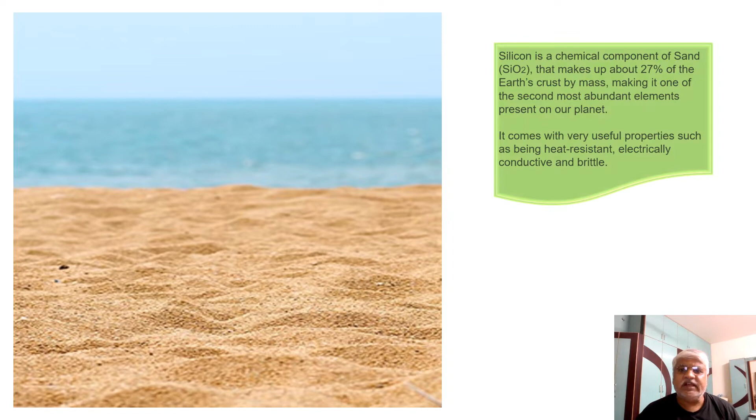Everyone has seen sand, which is nothing but silicon dioxide, and its chief constituent is silicon. Silicon makes up about 27% of Earth's crust by mass, making it the second most abundant element on our planet. It has useful properties such as being heat resistant, electrically conductive, and brittle. A very important aspect of silicon is that it's neither a pure metal nor a pure non-metal—it is a semiconductor, and it is the most widely studied element in the periodic table.

The basic requirement of a semiconductor material is that it should not be a very good conductor of electricity, nor should it be a very bad conductor of electricity. Its electrical properties can be changed by adding known impurities. Silicon is thus the most widely studied semiconductor material in the periodic table.

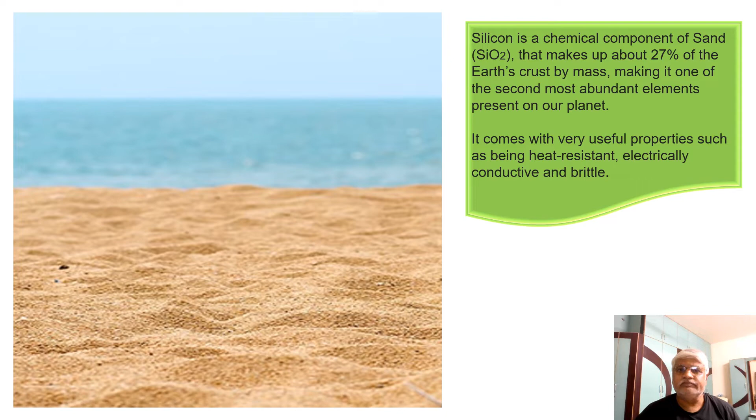We know that about 60% of all buildings in the world contain concrete, and in most cases concrete consists of about 30% sand. So you can imagine how much we are using silicon in our day-to-day life.

For many centuries, most silicon has been used commercially without being separated, often with very little processing, especially in construction of buildings and roads. However, the late 20th century to early 21st century has been described as the silicon age, also known as the digital age or information age, because of the large impact the element silicon has on the modern world economy.

We know the average price of sand is about $10 per ton in the global market. However, you will observe that when it's purified further, its worth in applications differs significantly.

You will observe that industrial silicon is produced at about 2 million tons per year. Out of that, ferrosilicon and aluminum silicon alloys constitute around 45% of the 2 million tons, 35% is by silicones and silanes, 12% is solar cells, and a meager 3% of the 2 million tons per year is by semiconductor ICs.

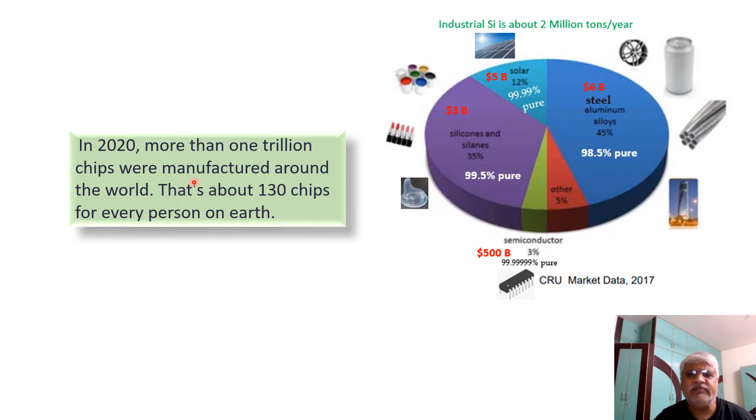In 2020, 1 trillion chips were manufactured in the world, and these are the several varieties of places where silicon chips went and changed the world economy. It is not only in air force, aerospace, automotive, or smartphone applications, but even in healthcare, like hearing aid applications and pacemakers. These chips are coming into our day-to-day life and impacting the world.

You will also observe the global semiconductor market of different countries, how much they are producing, and the effects of this. You will also observe how, in the coming years, however much we are producing, all these things are resulting in different shortages.

Last year, the chip shortage led global automakers to make 7.7 million fewer cars, resulting in around $210 billion hit to their revenues. Aside from that, even automakers like Maruti in the Indian market segment cut down production by 60% compared to normal levels in 2021 due to chip shortage.

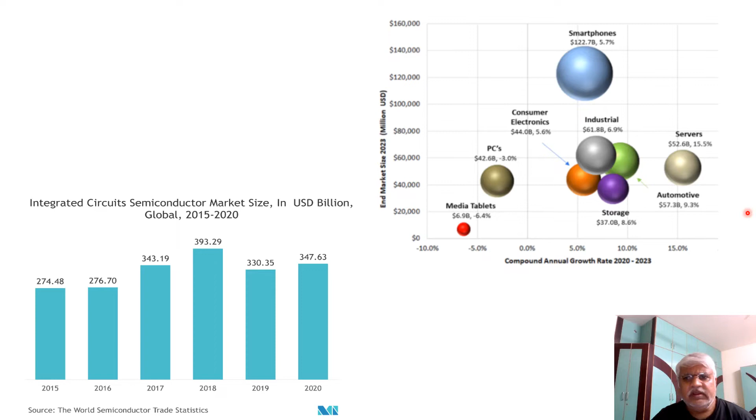So there are opportunistic moments which, if one observes very closely, you will understand that there are some pockets and gaps which we can fill in over the period of time.

By observing the earlier indicators on semiconductor manufacturing, we understand that key decisions need to be made. If we go based on traditional empirical analysis methods, we will meet the situation only to a certain extent. But if we go based on advanced analytical methods, we understand that the way of solving is first having a vision.

That vision is basically set as a $5 trillion economy by 2025 for India. For that, there are some key critical decisions that need to be made: policy reforms, infrastructure and logistic support. We need to understand what insights drive these decisions.

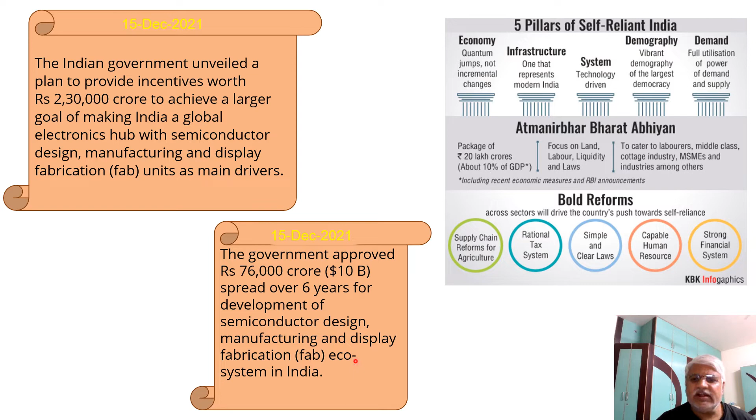Aside to that, it proposed and approved 76,000 crores, equivalent to $10 billion, spread over 6 years for the development of the semiconductor design, manufacturing, and display fabrication ecosystem in India.

All this has led to several other improvements, and they categorically mentioned that for device manufacturers or foundries, or Indian companies or consortia with an Indian industry partner desirous of setting up or expanding existing semiconductor fabs in India, preferably with a node size of 28 nanometer or lower, wafer size of 300mm, and a capacity of 30,000 wafer starts per month or more, these incentives will be applied.

So these are the specific and categorical modifications and incentives suggested, quite different from what has been proposed in earlier years. These are all very clear and specific about what needs to be achieved, with the process node mentioned clearly as 28 nanometer or lower, the wafer size, and the outputs of the fab.

All these things are clear about where it needs to be ensured, and it is also clear that whether in display fabrication or in the manufacturing area, if any of these areas is improved, then the incentives will apply.

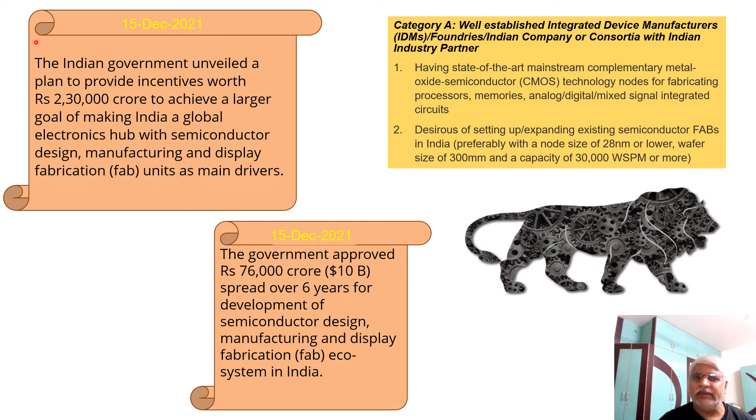To realize the vision of a $5 trillion economy and become an electronic hub as part of it in the future, you need to understand the different segments that play a vital role in the manufacturing area. The first one is the IC design area, where several fabless semiconductor companies work.

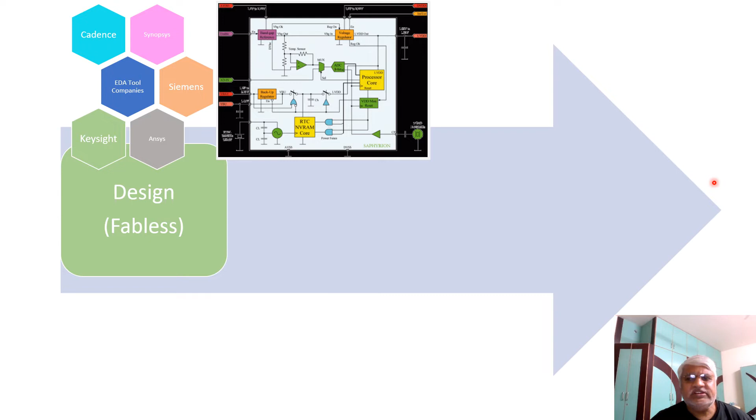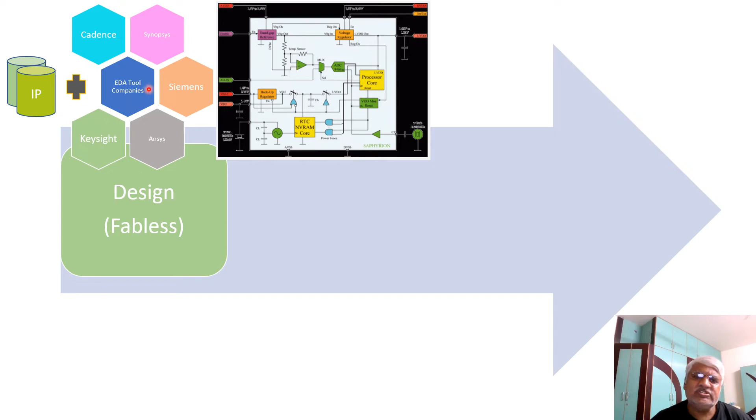They work to realize a manufacturable content. So the product, which is made into specifications, will be converted through several EDA tools - electronic design automation tools - by these companies using several libraries of intellectual property data.

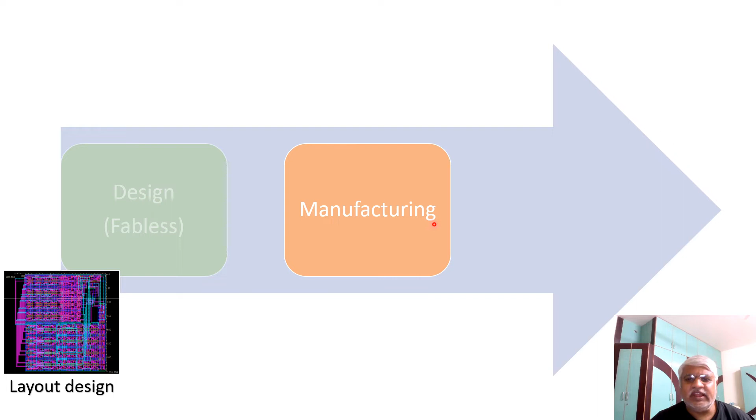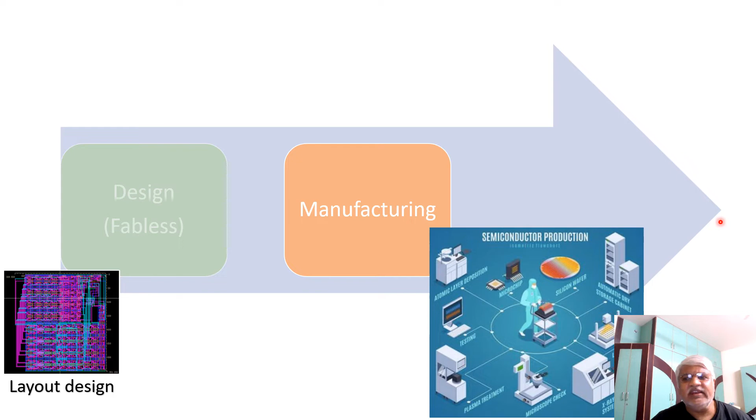Then the design content in specification format will slowly be converted into manufacturable content data, which will be taken by the next stage, that is manufacturing. This manufacturing area will take this manufacturable data and take it through several phases like photolithography, ion implantation, etching, sputtering, chemical vapor deposition, and then make the digital content into a physical form.

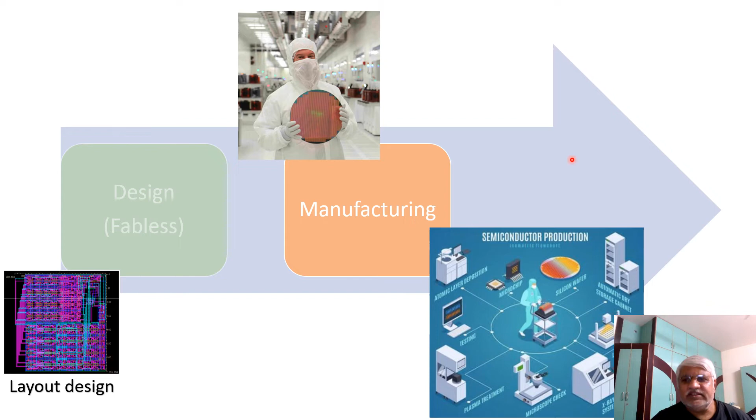This is the wafer. This wafer is further taken through the next step of assembly and test, where it is cut into small dies, which will be tested, and it will be assembled to the package, then tested again and put into a package after final testing. That is how this packaged IC will be ready for putting into the concerned application or system.

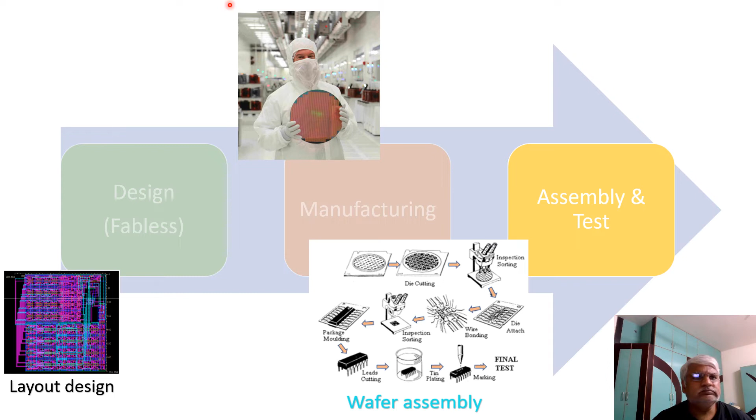You will observe that IC design, manufacturing, and assembly and test are the three main different items which basically start from the concept of IC, from a product specification, all the way up to making a packaged IC. The integrated device manufacturing is the one which will encompass all these three stages, and pure play fab is only related to manufacturing, and only IC design is called fabless semiconductor.

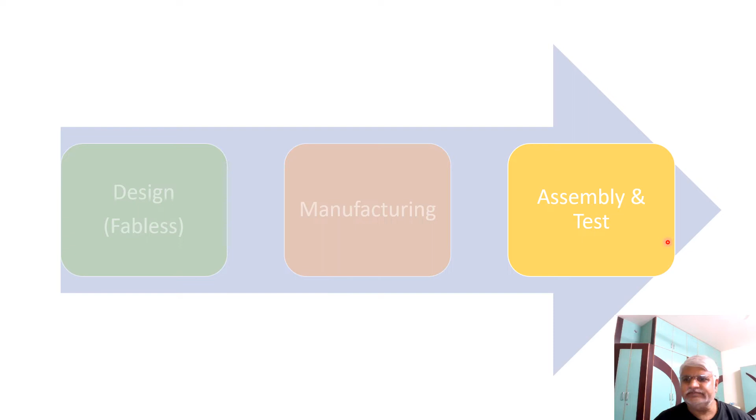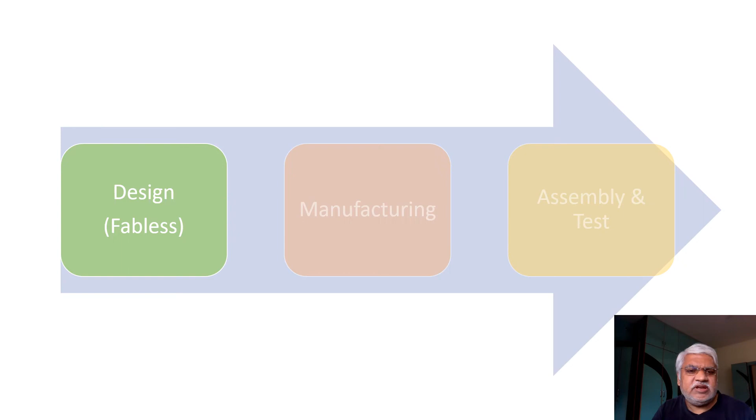In the IC design phase, fabless semiconductor companies will first figure out what the IC should do and what is the main purpose of the application. Based on that, they convert requirements into design specifications, for example display size and format to be supported, CPU speed, memory requirements and battery requirements.

This high level description is converted into the next stage, where the design architecture breaks it into different components and how they need to interact. Once the architecture is figured out, it needs to be converted into hardware description language, into a slightly lower level format. Verilog tools help with this, and it is written in Verilog code. This Verilog code is checked through Verilog simulators to ensure the desired functionality is achieved.

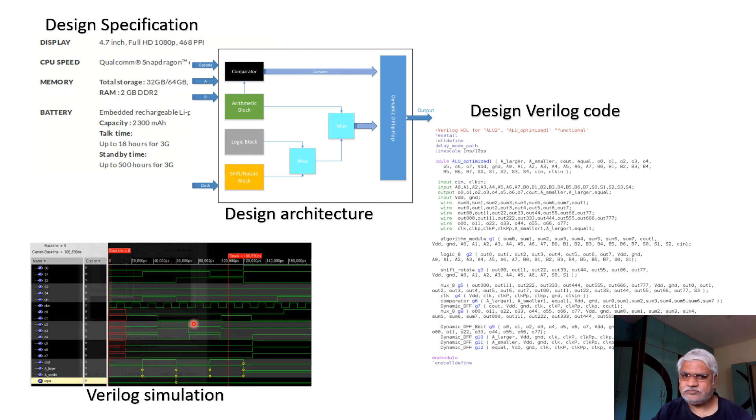The design data obtained in Verilog HDL at a very high level needs to be converted into a specific process node depending on time and cost, made into a realizable format which will be sent to manufacturing. At different times, different process nodes have been selected: 45 nanometer, 32 nanometer, 22 nanometer, 10 nanometer, and so on.

This gives the flexibility for cramming millions and billions of transistors into a small area. That is the main reason why smaller process geometries are preferred, and the speeds also will be very high at smaller process geometries.

To realize the higher level design information into realizable data ready for manufacturing, there are different steps that need to be taken. It needs to be converted into specific libraries associated with the different process node.

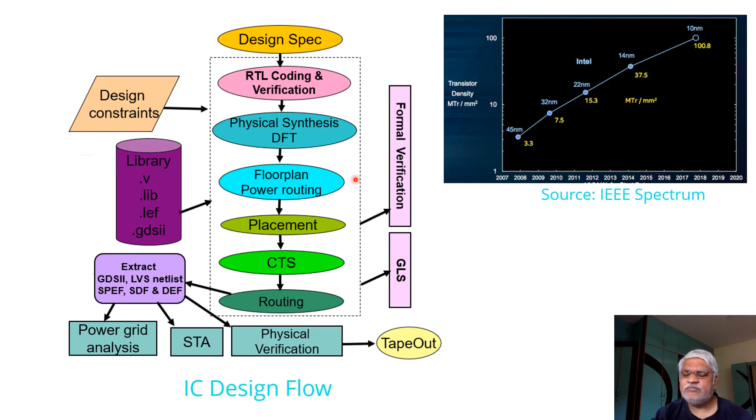Once all these things have been ensured, we need different EDA tools that I described earlier, from different companies that help bring the design specifications into a realizable data format. Companies like Cadence and Synopsys provide electronic design automation tools to bring the high-level design data into a realizable data in a specific process node.

But still, this is not physical data. This is still digital data. However, this is fit for manufacturing.

Using the IC design flow specified earlier and using the EDA tools, the high-level design data will be converted into realizable gates form based on a specific process node, for example 28 nanometers. Then that will be converted further into the lower level design format, which is called layout.

So here now the actual manufacturable content will be created. When this format has been created, you will understand that this design data should be timing wise and functionality wise consistent with the higher level design specifications and the need.

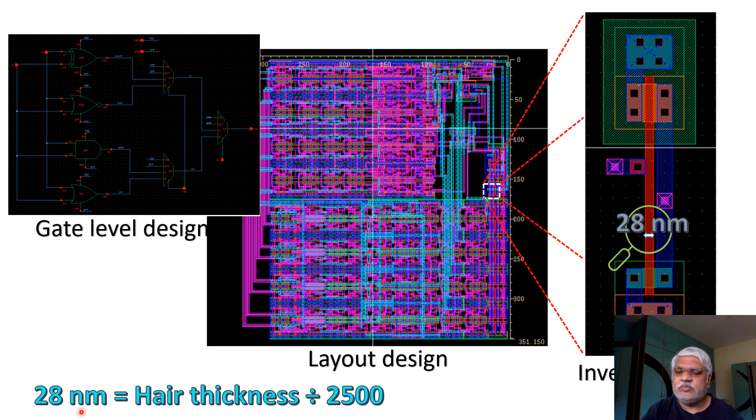28 nanometer means it is closer to hair thickness divided by 2500. That means that much small is the geometry we are talking here, in nanometers. So this is how small is the process node we are talking about.